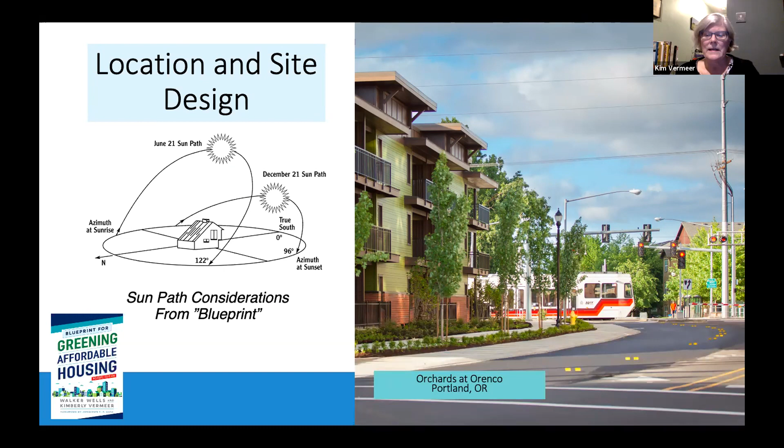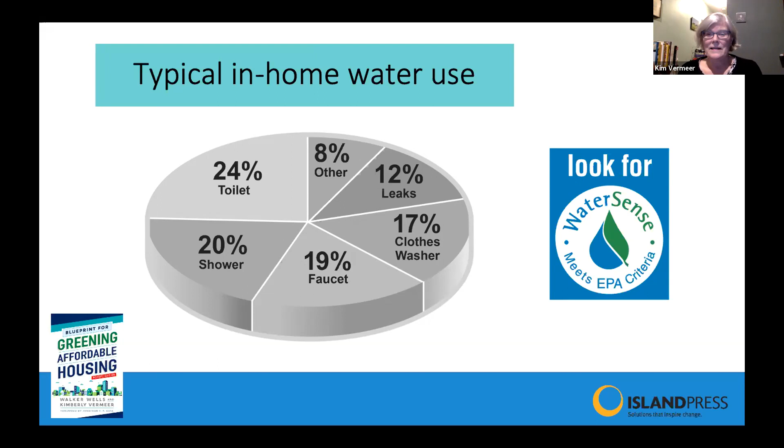Inside, we know that if we switch to WaterSense qualified fixtures and other low flow fixtures, we can dramatically reduce the amount of water, focusing especially on faucets, showers, clothes washing, dishwashing, toilets, trying where we can. And we know the leading edge, maybe the bleeding edge, is thinking about gray water and recycling water and those kinds of things. I would imagine that's where we'd expect the leading edge to keep pushing to get to water positive or water neutral at sites as well. But we can always start with WaterSense rated appliances and fixtures.

Of course, with energy, I like to say that the most important energy in a building is the energy it's never ever going to need. That means building high quality envelopes and making sure we need as little energy as possible to keep people comfortable. Then, once we've done that, let's try to supply that energy from clean sources like PV or even solar hot water.

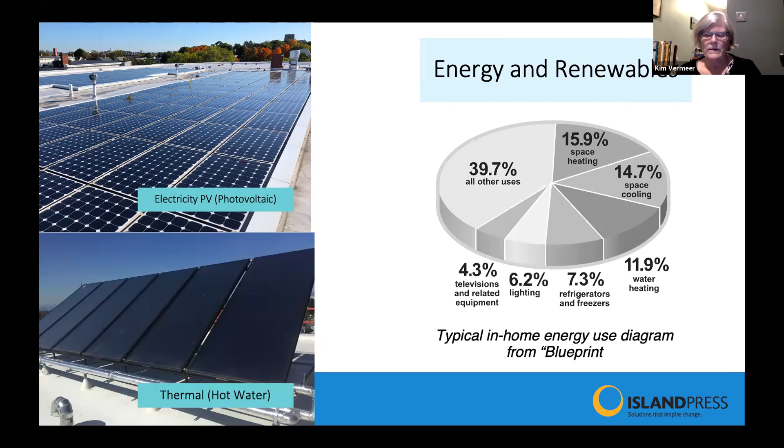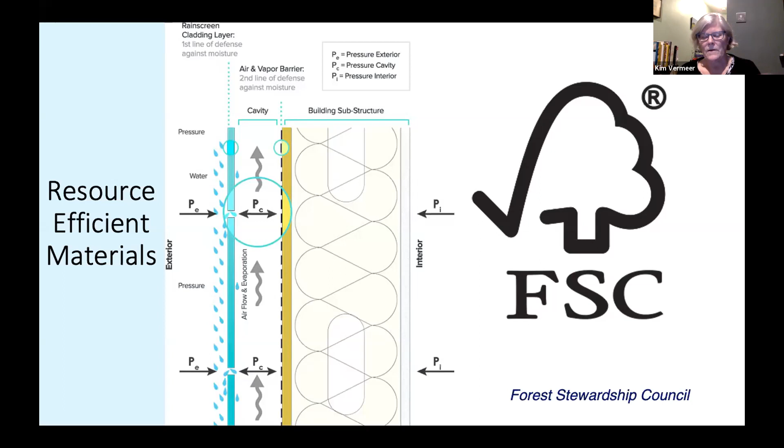In terms of resource efficient materials, can we think about how we build and the materials we use, and try to minimize the environmental impact of extraction and manufacturing? An important element of that as well is, can we build in durable ways so our buildings last longer? If we can have a building that lasts 50 years, 100 years, or 150 years, that is an efficient use of materials and allows other materials to be used for new building rather than rebuilding.

Indoor environmental quality—that we experience through the choice of materials we use for finishes—tries to limit the amount of volatile organic compounds and other off-gassing from materials. And we put in good quality ventilation systems.

This is one thing that's been really important this year as we face COVID: many green buildings, especially in affordable housing, function better because they have good quality ventilation systems designed to bring direct fresh air into units and exhaust it from units, in a process of compartmentalizing that makes each unit, even in a multifamily building, stand alone from a ventilation standpoint, so the air isn't shared with the corridors or with next door neighbors. That really offers a protective effect for people worried about airborne transmission of disease.

And of course, trying to limit or prevent smoking in buildings from a health point of view. Exposure to environmental tobacco is a real trigger for asthma and other respiratory illnesses, so we want to try to avoid that as well.

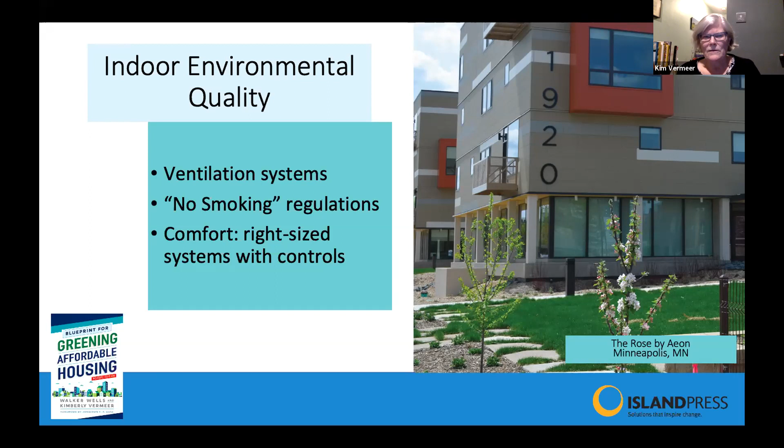Comfort is an important element of indoor environmental quality. If we build fancy systems but the people living in the apartments can't figure out how to be comfortable, they will undo our fancy systems. So making sure we're right sizing systems so they function correctly, and then giving individuals controls so they can set the right temperature for their situation and family, is really critical to indoor environmental quality.

So just giving you a little snapshot, a look ahead to our case discussion, of how all of this comes into play in a project. Walker, were you going to do this, or should I finish this one? Okay, I'll give it back to Walker.

So, yeah, these are just a few snapshots, and we're going to hear from Brian and Tina in a little bit. But both of these projects, Century Villages at Cabrillo and then the Crest, are in the book as case studies, highlighting the role of landscape and how the site is treated in concert with the building.

So, green practices at Century Villages at Cabrillo. A couple of LEED buildings, but starting with the LEED building became a catalyst for a discussion about thinking of the campus as a neighborhood and looking at LEED for Neighborhood Development. We'll have Brian share a little bit more about that. Go to the next slide.

So you can see the extent of the new construction, but we'll get to hear about the extent of all the buildings, and also the amazing amount of services, the fairly large population of people that live there, as well as what you see in this diagram from the master plan about the vision for how things can get built out over time to make it even more village-like, more walkable, more cohesive, and more sustainable.

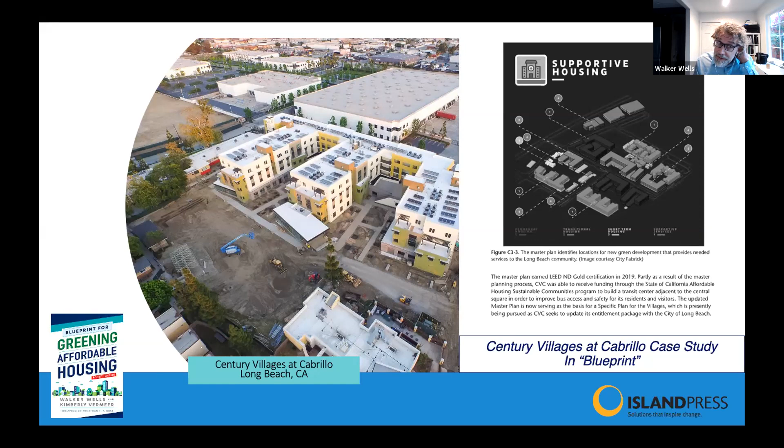And then the next slide. This gives you a quick overview of the Crest. Tina will be talking about the landscape. It's a very attractive building, but I think the landscaping is probably the most seductive. It's certainly very interesting how a lot of these problems have been solved, which we'll learn about.

It's a LEED for Homes Platinum building. Ambitious architecture, but also I think it demonstrates how green and design can be mutually beneficial. One thing I noticed with this project was because there was such attention to design, the contractors became incredibly diligent about fixing things. I could not believe the level of care and finishes that went into this, but they just say, well, the architects are demanding it, so we can't screw around on this project. So it's almost just by force of will. We'll hear more about that one.

And then this next section is just about cost and financing. It's easy to get into platitudes about housing as a human right, sustainability, restorative design, integrated design process. But of course, things do cost money. So we need to be very conscious about managing cost and then thinking about what aspects of green building actually reduce costs or produce different kinds of revenue streams, or enable us to rejigger our assumptions about sources of cost and sources of revenue.

The good news is that affordable housing has some unique opportunities to do just that, and to transcend this thing called the split incentive, which we'll talk about in a minute.

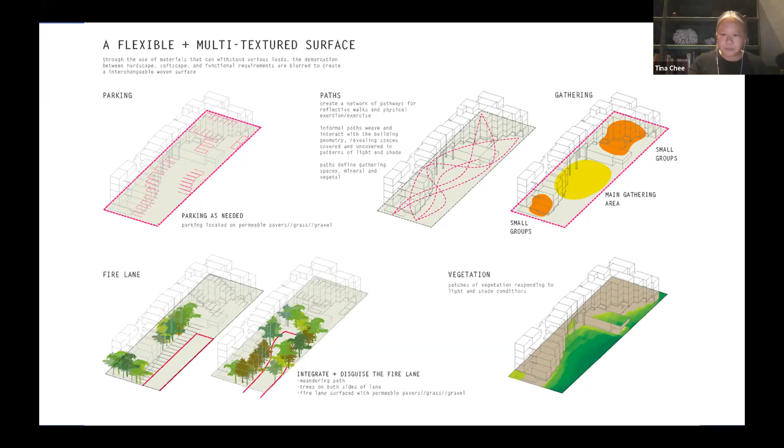But in our naivete, I suppose, which perhaps was to our advantage, we thought, okay, let's challenge ourselves. We wanted to think about this surface, this site, 90 by 300, and how many things we could get into the site. If you go to the next slide, so you can read some of these.

The other side of the coin was that, like I said, we were in the drought and really had this ambition to think about sites—every site in Los Angeles could be a little bit like a stormwater filtration machine or a sponge. If every site could do that in LA, it would be so much better for our infrastructure, water infrastructure, the LA River, the pollutants that get out to the ocean. If we could all do that, it would be so wonderful. And then of course, capturing all the water we can because we were in this drought.

So thinking about the site, making it as permeable as possible. We wanted to consider gray water, but it was not in the cards at that time—there were still things we were working out, so we couldn't take that up.

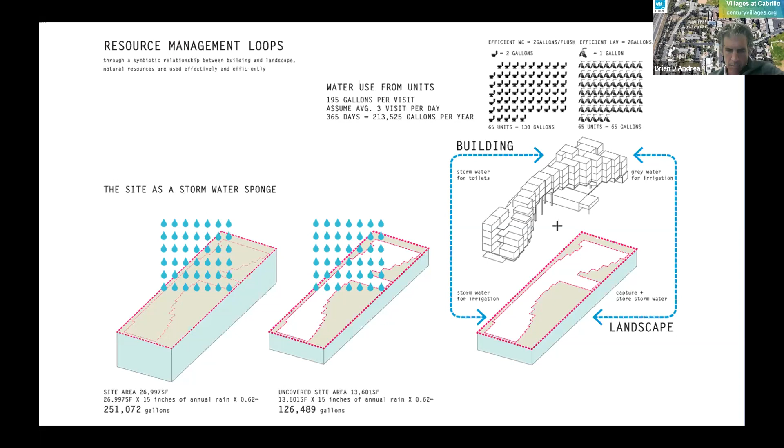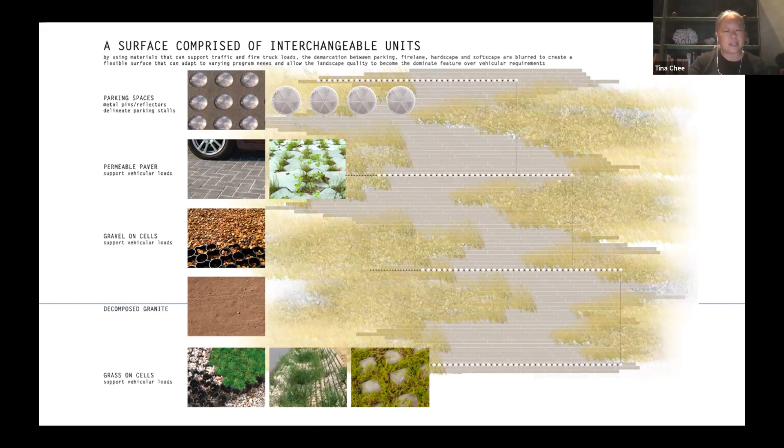And so if you could go to the next slide.

At the same time, we were told this was for formerly homeless veterans, and we didn't know at the time how mobile these people would be. So we wanted to create a surface that was very universally accessible, no steps, just gentle slopes, so that it had this very communal effect of bringing people together.

The way the architects had approached it, it almost had a very light touch on the ground plane, which was really great. But then when you started to factor in the parking and the fire lane, the whole site started to erode, and it was really troubling to us, because we thought, gosh, if these people are not very mobile, this may be their park, since the next park was in the valley.

It was like 3 miles away, and if they weren't very mobile, how would they get there? So we really had this strong ambition to satisfy all our drought conditions, but really make this place a park in a sense. We couldn't bear the fact that this parking and fire lane was going to destroy that possibility, so we started to challenge ourselves to free ourselves from our preconceptions, and really think about what the code was saying and how we could reinterpret its surface expression.

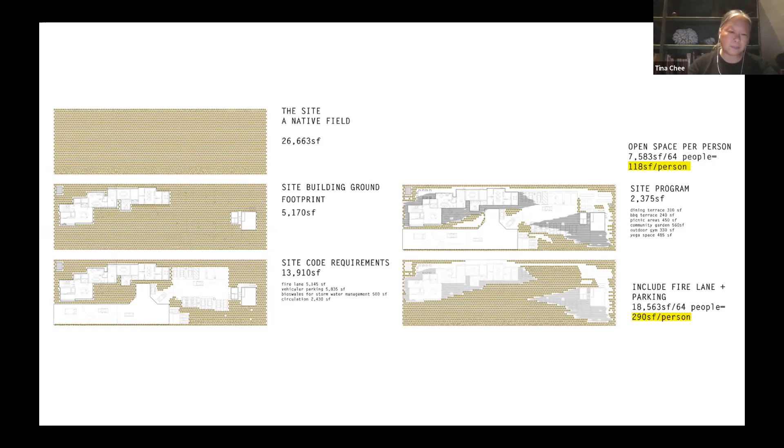So this is the plan that we came up with, and you can see the landscape commands the entire ground plane, in collaboration with the architect, Michael Maltzan Architecture. Michael had been thinking about the LA housing typology, the Dingbat house, where you have units on the second level and parking on the ground floor underneath the units. Underground parking would be cost prohibitive, so we had to have the parking on the ground plane.

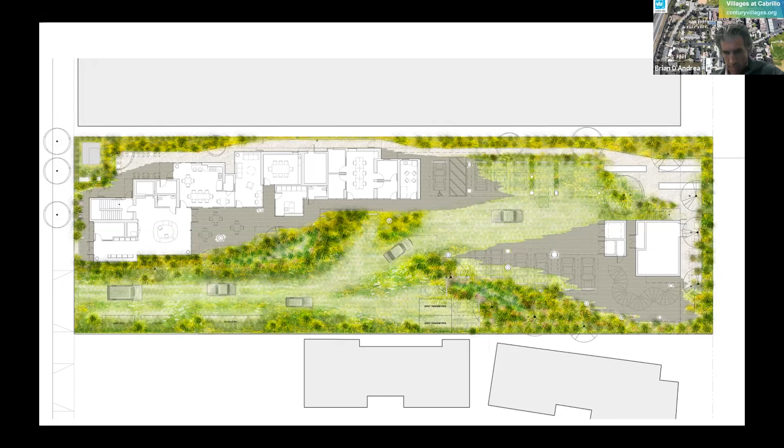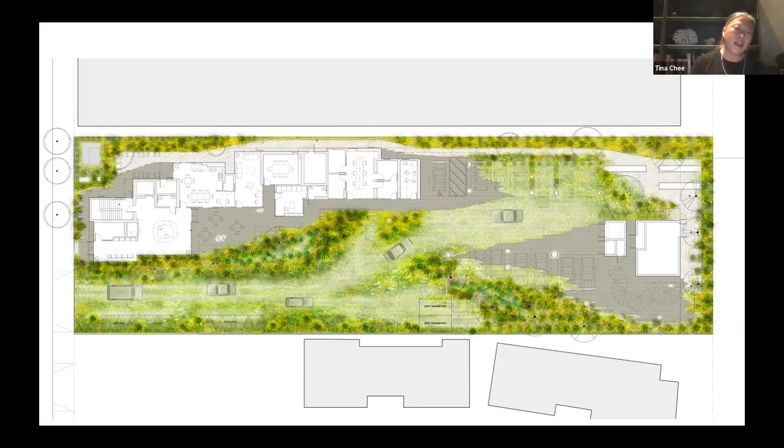So he lifted the building up, which was really great because the landscape could then command that ground plane and stretch property line to property line, giving context to the building. We still provided all the programs the building needs - reception, community kitchen, dining terraces, office space for service providers, trash and all of that. We also have the 18 parking spaces, the fire truck turnaround, which you can make out in the front, plus 2 bioswales that take the roof rainwater and filter through there, and community gardens in the back.

We created every space not covered by the building to be completely permeable, and I believe that is the reason we were able to achieve LEED Platinum. It's also because all the plants are low water, so in a sense the entire site was permeable. Then taking the roof rainwater through was in addition - so I could say we effectively treated all the water falling on our site.

You can see the building lifted up off the ground - that's where the parking spaces were. The planting is a very unmanicured type of landscape, and there's this ease of flow between the inside and the outside. It's almost as if the landscape is slipping underneath the building, creating this sort of borderless landscape, where you have the sensation of the landscape extending way beyond its property lines.

So I'm just taking you through the building - that was the dining terrace. Now we're coming back behind the dining terrace, and you can see the driveway we created with the meadow-like field in the background.